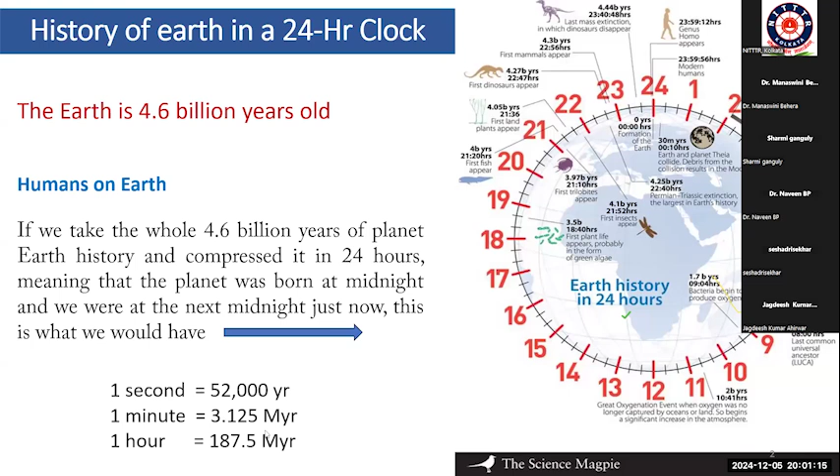Okay. So why I am saying this? Because the way we are exhausting the world's all the resources, we are just creating the pollution. For that, we are studying the management, right? So Earth was existing before our existence. Earth doesn't need us. We need Earth for our existence. For that, we need to conserve our resources and we need to keep our Earth in a livable condition. For that, everything comes in the management.

Like solid waste is a part, which is a major concern nowadays because in few years, India will be requiring the area for solid waste disposal; the area of Bangalore, Hyderabad, Mumbai, and Kolkata, whatever is the area, that much area will be required for dumping the solid waste the way we are generating.

Now you can see the population growth, world population growth through history. You can see the future increment in the 21st or 22nd century. And we can see we will be soon reaching 12 billion in 2100. Okay, though the rate of growth is decreasing, the population is rising. And accordingly, we are generating more waste. Our consumption is increasing and we are generating more waste, which is to be managed.

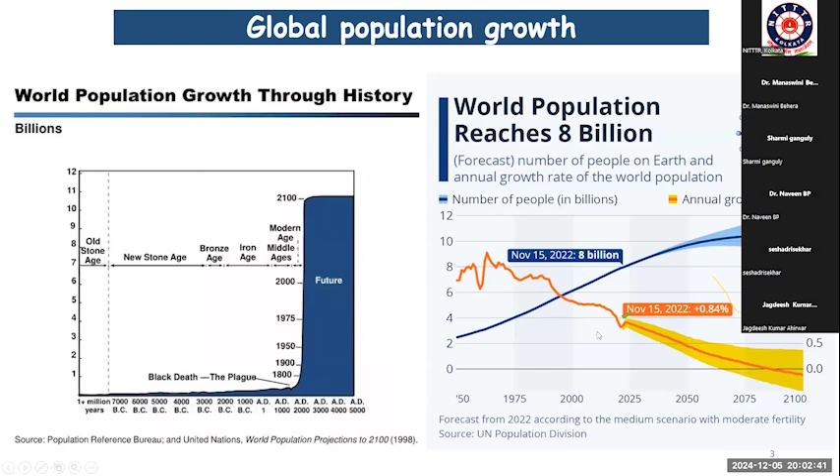Then here you can see another problem is in the solid waste management in this urban area. Okay, this figure shows the share of the total population living in urban area.

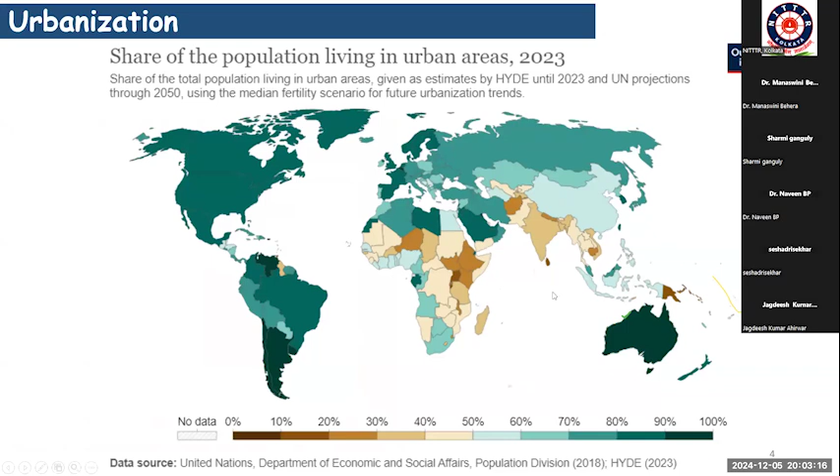You can see more than 50%, the green or dark green regions are the share of the population living in urban areas. And you see not in India, but in other parts, mostly North America, South America, the European Union, Russia, and Australia, most of the people are living in urban areas.

This urbanization trend shows that in 1900, 2 out of every 10 people lived in urban areas. But by 2050, 7 out of every 10 people will live in urban areas, meaning more than 70% of the global population will be living in urban areas.

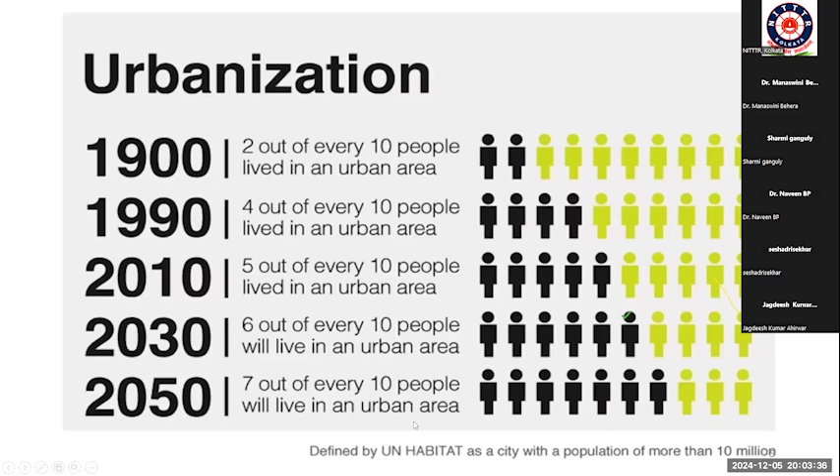Almost all population growth is expected in cities and towns of developing countries. By 2050, the most populous countries, India and China, will see major urbanization: in China 70% of the population will be urban, and in India 50% will be urban. More than 26 cities will have over 1 million people.

This urban growth will require 100 to 200 million hectares of land.

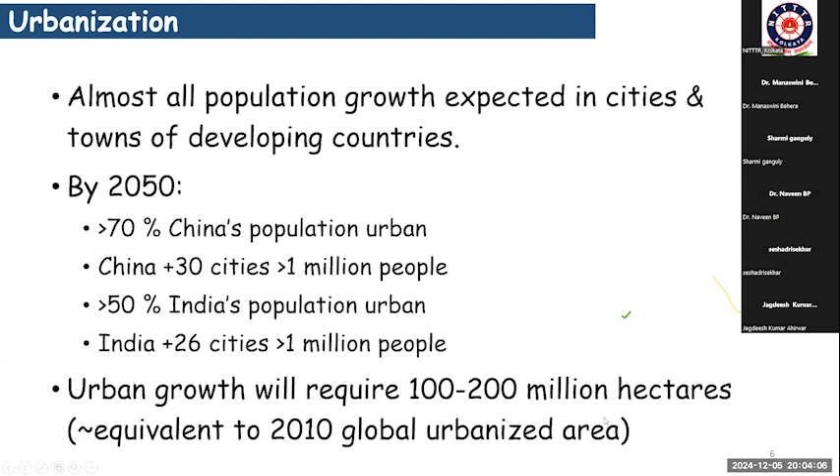Another important concept is Earth Overshoot Day. In 2024, Earth Overshoot Day falls on 1st August. It marks the day when humanity has used up nature's budget for the year. Whatever resources exist on Earth for the population, we have consumed them all for the entire year by 1st August.

After 1st August, whatever we consume, we are taking from our future needs, from next year's resources. For the rest of the year, we maintain an ecological deficit by drawing down local resource stocks and accumulating carbon dioxide in the atmosphere.

In that context, if you see the trends in solid waste generation, the world generates around 2.01 billion tons of municipal solid waste as per World Bank data in 2024. At least 33% of that is, very conservatively, not managed in an environmentally safe manner.

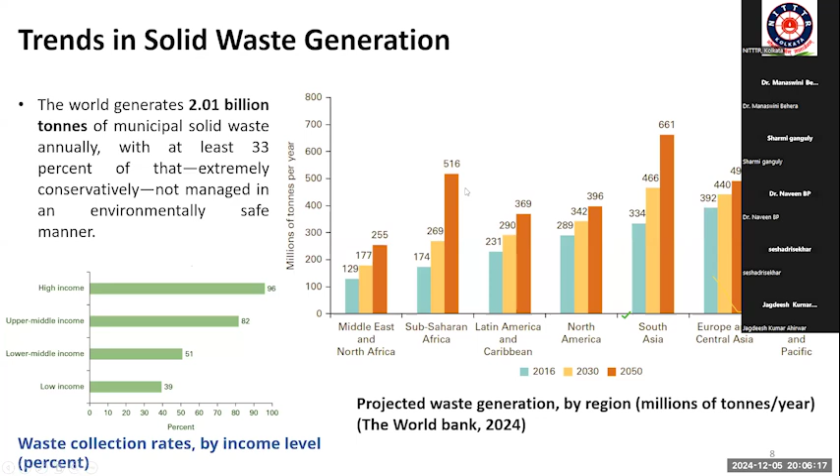In sanitation, solid waste also plays a part when we dump it in receiving water bodies, polluting drinking water supplies. Also for sustainable cities, we need to maintain them sustainably, which means ensuring the solid waste generated in the city is well managed. To attain goal 11, solid waste management is required.

Now coming to solid waste management, refer to this figure. This we cannot call a landfill - this is just a dump site where everything we are not using, which is of no use to us, we are just dumping.

In a properly managed way, waste should be segregated into different bins, but in most Indian cities this is not happening. As far as possible, we have the Solid Waste Management Rules 2016, which require proper segregation at source, proper collection, proper transportation, and management as per the solid waste management hierarchy - but it is not happening.

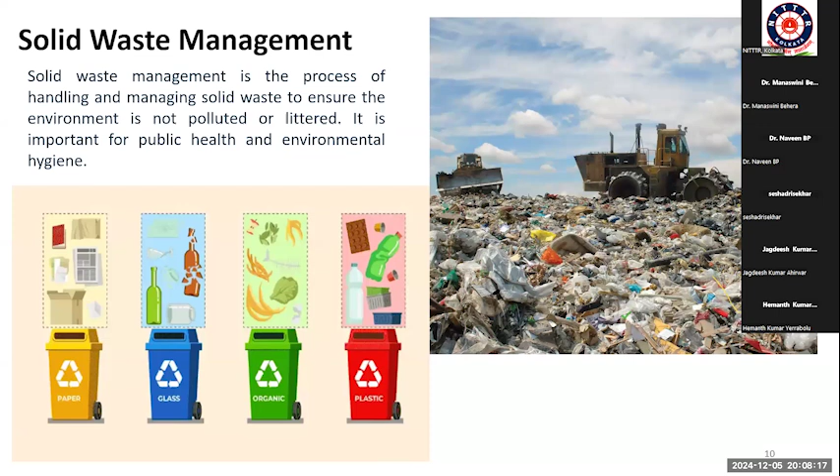Biodegradable fraction is 50%, recyclables are 20%, inert is 22%, and others 8%.

But to attain the sustainable goal or circular economy, we have to shift the paradigm towards a new waste management approach, where the least preferred option should be landfill disposal and the first option should be waste prevention, refuse, or reduce. Through product design and producer responsibility, we can reduce the generation of solid waste.

After use, we should focus on reuse, which is the next option. Then the next option is recycle. After reuse, it should be recycled into its original product or some other product, and then reused again.

Then the next thing is conversion or compost. Compost means the biodegradable fraction is composted to get manure.

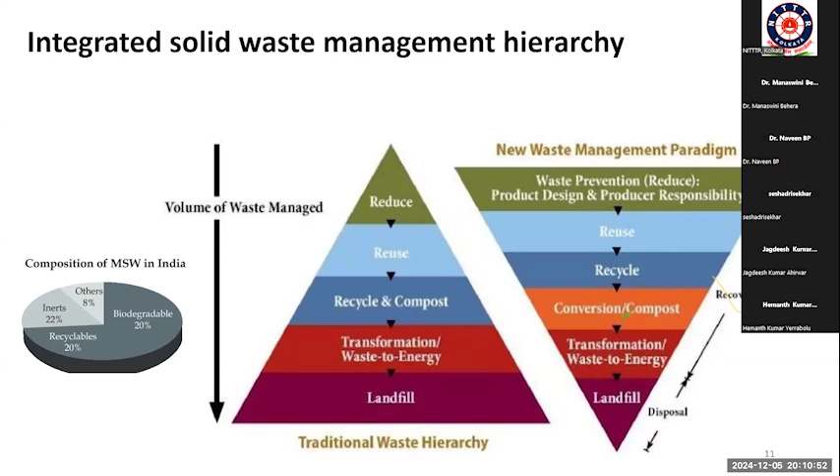Today's topic is waste to energy through thermal conversion. So we will be focusing on thermal conversion. What is thermal conversion of solid waste?

These processes are methods for treating solid waste by heating it at high temperature to break down the organic matter. These processes can reduce the volume of waste by up to 80%, and simultaneously we can recover energy, making it a waste-to-energy facility through thermal conversion.

This thermal conversion can be classified as incineration, gasification, pyrolysis, or plasma arc gasification.

Incineration is a complete oxidation process that burns waste at high temperature to produce ash, flue gas, and heat. Gasification is a partial oxidation process that uses a controlled amount of air or oxygen to produce syngas, which can be used to generate electricity.

In pyrolysis, a thermochemical decomposition process occurs without oxygen, producing mostly solid, liquid, and gaseous products. The primary products are biochar, a solid residue, bio-oil, a liquid residue, and syngas.

The last one, which is mostly in the research stage, is plasma arc gasification, a process that uses an electric arc to heat waste to very high temperature.

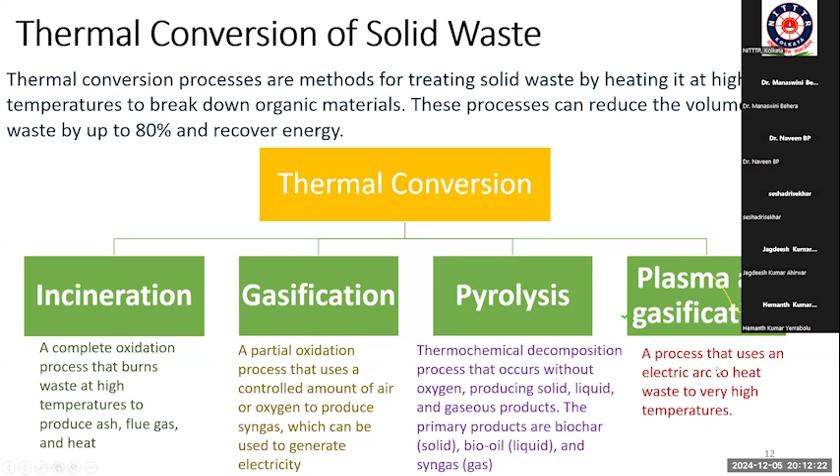Then we'll go one by one. What is incineration? Incineration is the combustion of waste at very high temperature in the presence of oxygen, resulting in the production of ash, flue gas, and heat.

Incineration is a feasible technology for combustion of unprocessed or minimally processed waste. Here, the processing of the waste is not very exhaustive. The waste can be segregated, and with minimal pre-processing, it can be used in the incinerator to generate heat and energy.

The potential for energy generation depends on the composition, density, moisture content, and presence of inert material in the waste. About 65 to 80% of the energy content of the organic matter can be recovered as heat energy, which can be utilized either for direct thermal application or for producing power via steam turbine generator.

Incineration of MSW helps reduce landfill volume. Generally, incinerators are preferred near landfill dump sites where segregation happens. If source segregation is not happening, as much waste as possible can be sent to incinerators so that the load on the landfill reduces.

Incineration is feasible and there is no better option for processing waste where there is shortage of land for landfill. For example, Japan uses incineration because they have very little land available for disposal or dumping of waste.

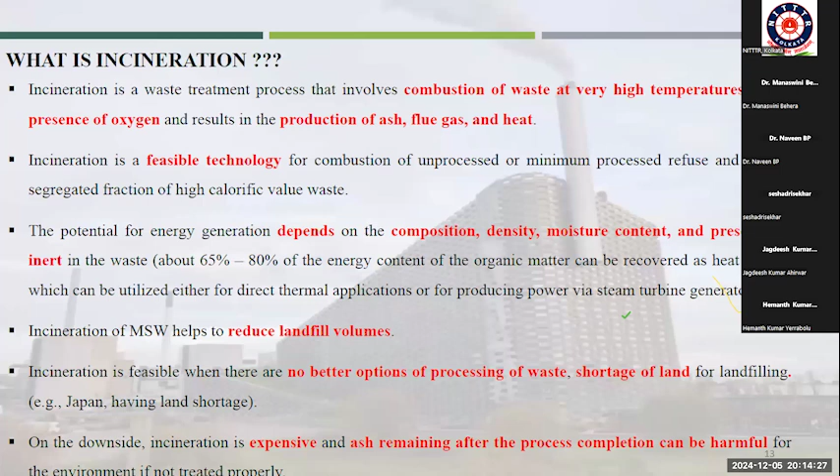Then, what is the incineration objective? One is volume reduction, so the weight of the solid waste to be dealt with is reduced by 70 to 75%. Then, stabilization of the waste: the incinerator output, like ash, is considerably more inert than the incinerator input, that is the solid waste.

Then, recovery of energy from waste. So, we can do the treatment of the solid waste and generate heat, which again can be used for electricity generation. Finally, it also sterilizes the waste.

This is the primary importance in the incineration of clinical or biomedical waste. Mostly all the big hospitals have their own incinerator for the sterilization of biomedical waste. So incineration also ensures destruction of pathogens prior to final disposal in the land.

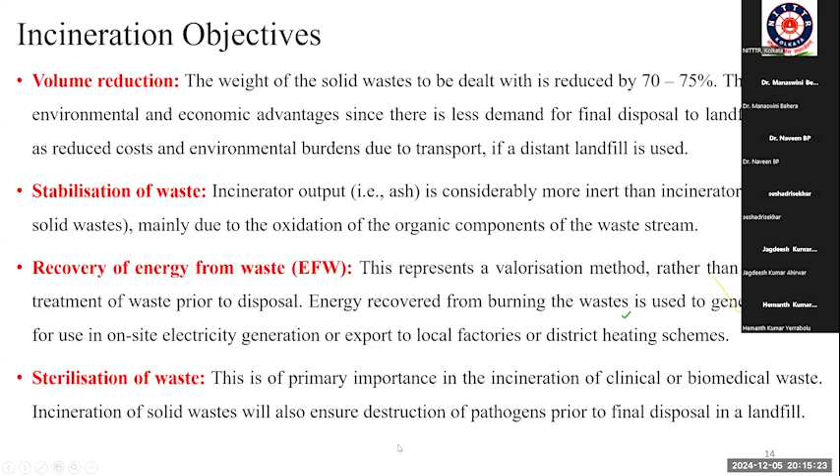So, which kind of waste can be used as fuel in case of incineration? The primary difference between waste incineration and other combustion systems like pyrolysis or gasification is that the waste incineration process treats incoming waste with great variation. So different types of waste composition can be fed into the waste incinerator, but the operating parameters should fall within a range for energy recovery.

There is a table, the source being the manual of MSW management. It says moisture content should be less than 45%, organic or volatile matter should be greater than 40%, fixed carbon should be less than 15%, and total inert should be less than 35%. The calorific value of the waste should be greater than 1500 kilocalories per kg.

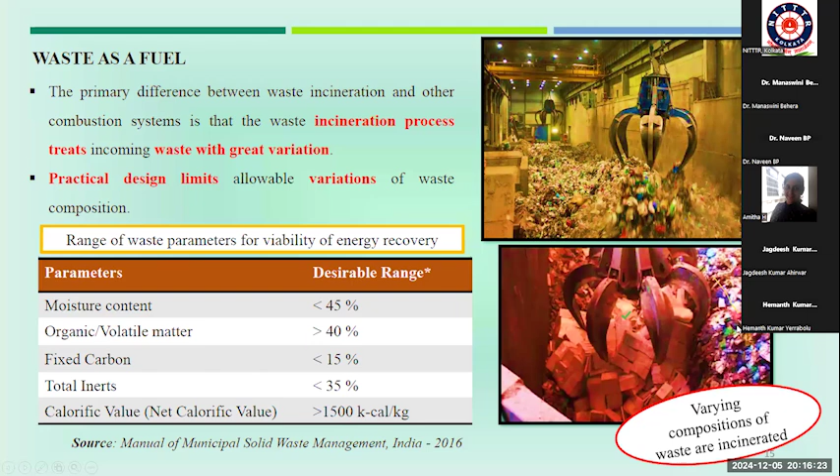So before designing any incinerator, the basic considerations are like having available data on the amount and composition of each waste type. It is not like we take a single day or one week of data and design an incinerator; we should have a good database on the type, composition and quantity of the waste generated, and the effect of future changes in waste management. In future, if there is a chance of taking up other technologies as a viable option to incinerator, then this plant may not be in use.

So we have to take care of the effect of future changes in waste management while considering the design of an incinerator, because the installation cost and operation cost are huge. The waste led to an incineration plant consists of domestic, commercial, institutional and industrial waste, so there is great variation in waste composition, but we should avoid sweepings and construction demolition waste. They are not suitable because they have a high inert content and a large fraction of non-combustible matter.

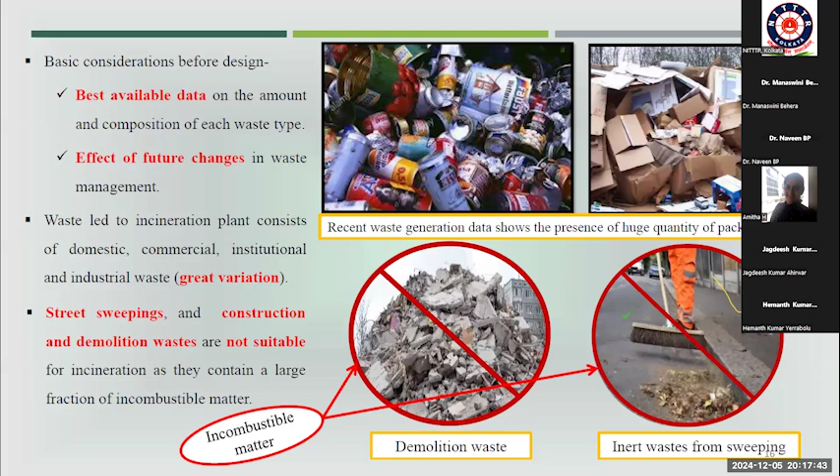So what are the key parameters in characterizing waste as a fuel? It is the heating value: the heat generated per unit weight or volume of combustible material completely burned. Heating value is roughly proportional to the waste that is combustible, excluding the moisture and ash content, and to the carbon content of the combustible fraction.

Then also moisture content, it is a critical determinant in the economic feasibility of the incineration process, since energy must be supplied for evaporation of water and for raising the temperature of the water vapor. It is generally found to be high in waste containing a higher proportion of food waste, so moisture content should be less than 45% if it is to be fed to an incinerator. Then ash content is the substance left after ignition at high temperature.

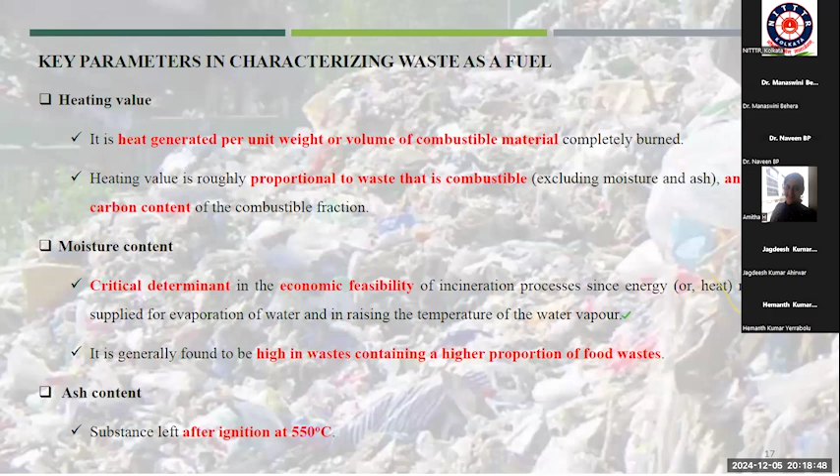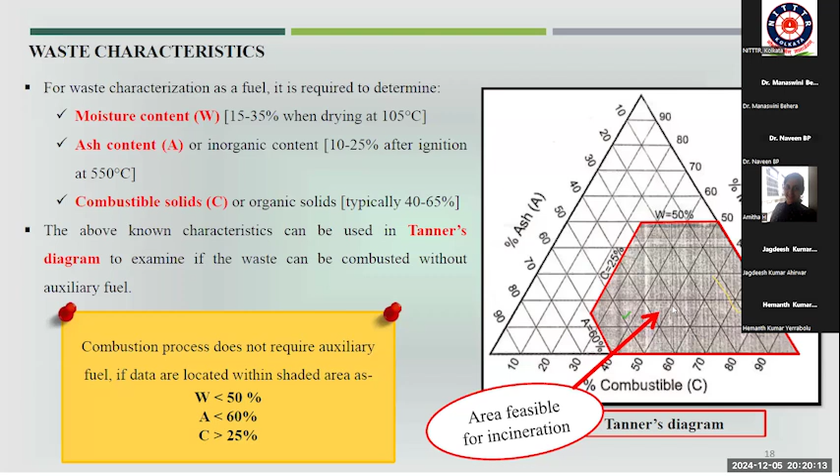Then heating value. We generally calculate the lower heating value and higher heating value. These are variables representing energy released upon complete combustion of a fuel: carbon to CO2, hydrogen to water, sulfur to sulfur dioxide. Whichever energy is released when water leaves the combustion process in its evaporated state, that is the lower heating value. The higher heating value is the energy released on complete oxidation when water leaves the process in its liquid state. It expresses the theoretical maximum energy release from the fuel.

So the difference between lower heating value and higher heating value is the heat of condensation of the water vapor content in the flue gas, originating from the moisture in the waste and moisture generated by the oxidation of hydrogen bound within the chemical structure of the waste.

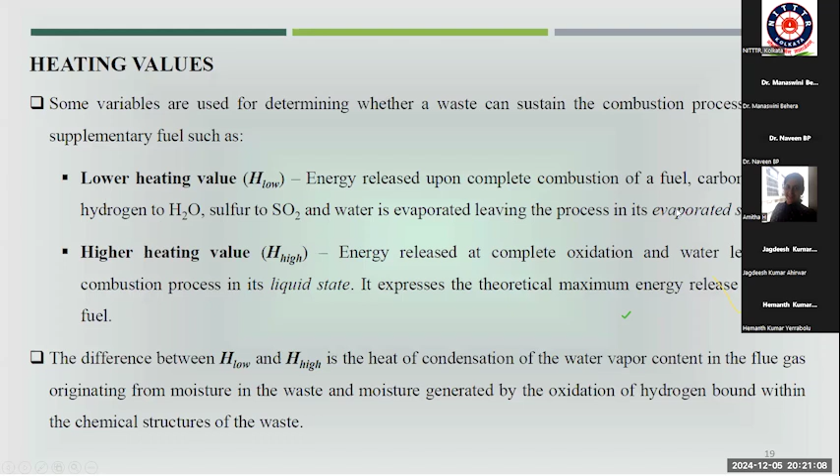Then the incineration process, how it happens in the incinerator: there is a furnace where the combustible components react with oxygen. The solid waste to be incinerated is kept in that furnace and oxygen or air is supplied, releasing a significant amount of hot combustion gas. The moisture content of the waste is evaporated in the initial stage, and the incombustible part of the waste forms the solid residue, that is bottom ash and fly ash. Through incineration, the solid constituents undergo a range of processes as a result of exposure to heat and contact.

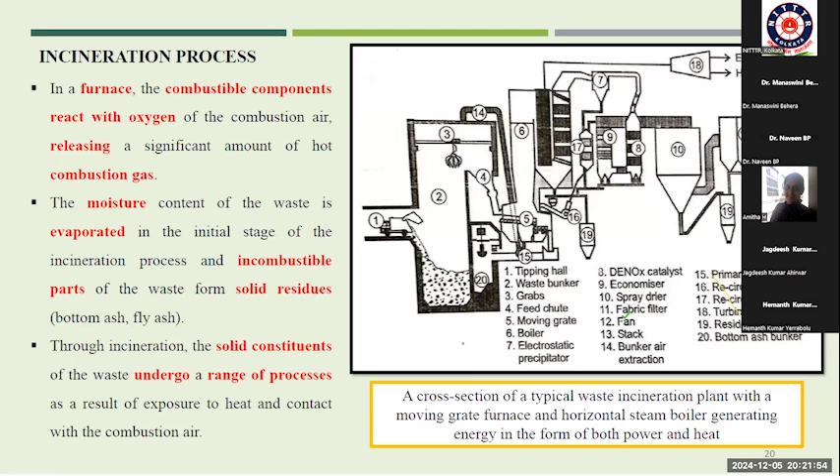The combustion gases pass from the furnace to the afterburning chamber. As per European Union standards, a minimum temperature of 850 degrees centigrade for municipal waste and 1100 degrees centigrade for certain types of hazardous waste has been set for complete burnout of the combustion gases in the afterburning chamber. These temperatures should be maintained for a minimum residence time of 2 seconds, as measured from the last injection of combustion air.

So there is strict legislation: no feeding into the incinerator before attainment of the required temperature. Once the 850 degree temperature is attained, only then should feeding be done, and a required residence time of 2 seconds should be given. If there is any interruption, such as a drop in temperature, feeding should be stopped right away. In India, as per the CPHEEO manual 2016, a minimum gas phase combustion temperature of 850 degrees centigrade for municipal solid waste and a minimum residence time of the flue gas above this temperature of 2 seconds, after the last incineration air supply, should be followed.

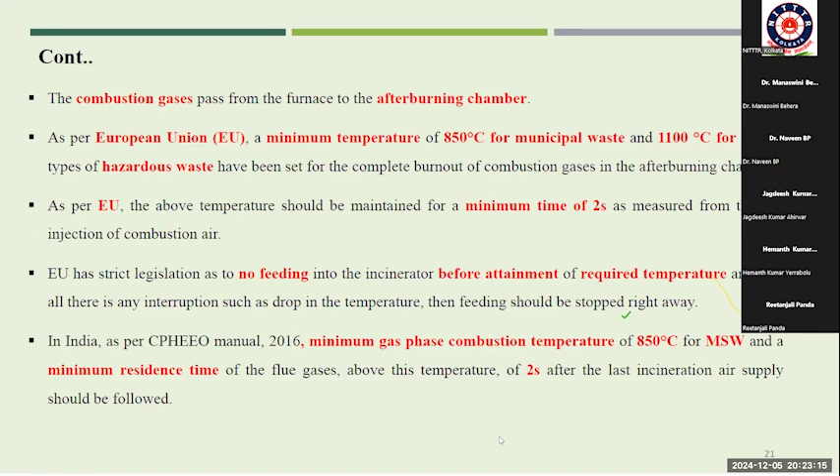So what pre-treatment is required for solid waste before incineration? Depending on the quality of the waste and the incineration system, some pre-treatment techniques may be necessary, involving sorting and homogenization of the waste before incineration. We have to sort out inert materials from the waste so that for proper mixing, a uniform waste is fed. So homogenization of the waste is required.

For mass burning incinerators, the pre-treatments include removal or shredding of bulky or heavy items, and mixing of low and high heating value waste. For homogeneous waste, pre-treatments include shredding for homogenization, screening for narrowing the particle range to the fluidized bed, and removal of metallic iron with magnets. So these are the pre-treatments.

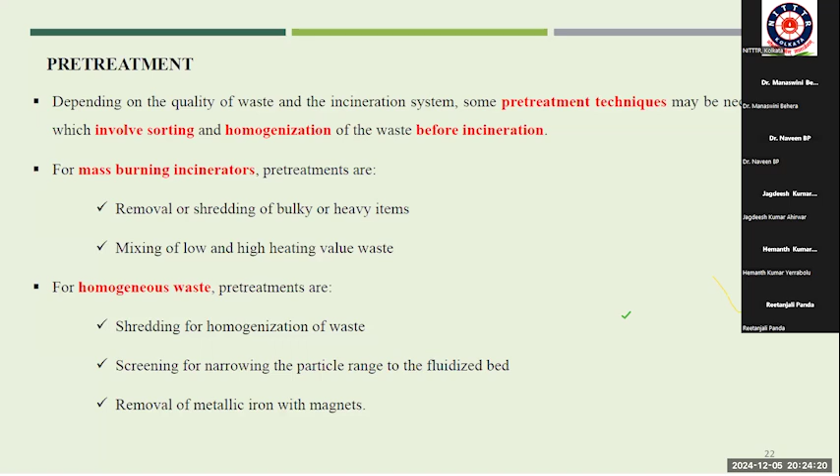Then, mass burning incineration. Most of the incinerators installed are mostly mass burn type. This facility typically consists of a reciprocating grate combustion system and a refractory-lined water wall steam generator. This mass burn system generally consists of either two or three incineration units, ranging in capacity from 50 to 1000 tons per day. These facilities can accept refuse that has undergone little pre-processing, other than removal of oversized items, which is why it is called a mass burning system.

Although this versatility makes mass burn facilities convenient and flexible, local programs to separate household hazardous waste like cleaners and pesticides, or to recover certain materials like iron scrap, are necessary to help ensure environmentally viable incineration and resource conservation as well. It is not like in mass burning all the MSW is just dumped in. Bigger size particles as well as metals should be removed before feeding into the mass burning incinerator.

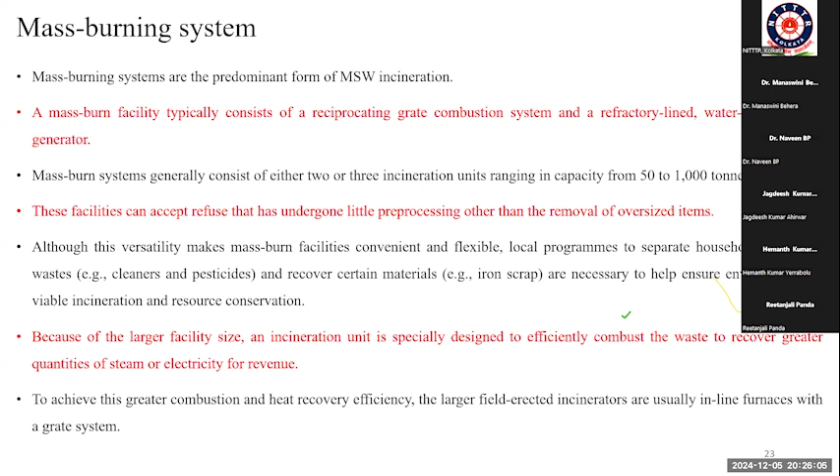Because of the larger facility size, the incineration unit is specially designed to efficiently combust the waste to recover greater quantities of steam or electricity for revenue. To achieve this greater combustion and heat recovery efficiency, the larger field-erected incinerators are usually inline furnaces with a grate system. The mass burning system can also be achieved by use of a rotary kiln. Rotary kilns use a turning cylinder, either a refractory or water wall design, to tumble the waste through the system, rotating for better mixing and better contact with the fuel.

The waste intake area usually includes a tipping floor, pit, or crane. I'll show the photograph later.

At least two combustor units are included to provide a level of redundancy, allowing waste processing at a reduced rate. Mass burn facilities generate high quality steam with high pressure and temperature, which is passed through a turbine generator to produce electricity, or through an extraction turbine to generate electricity as well as provide process steam for heating or other purposes.

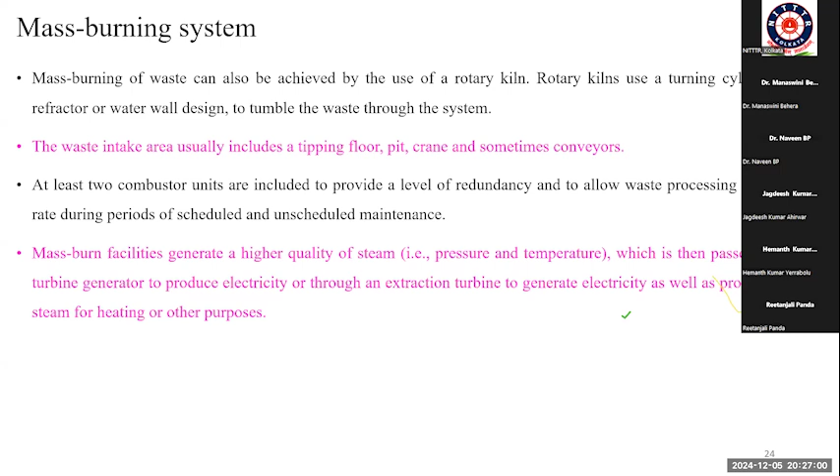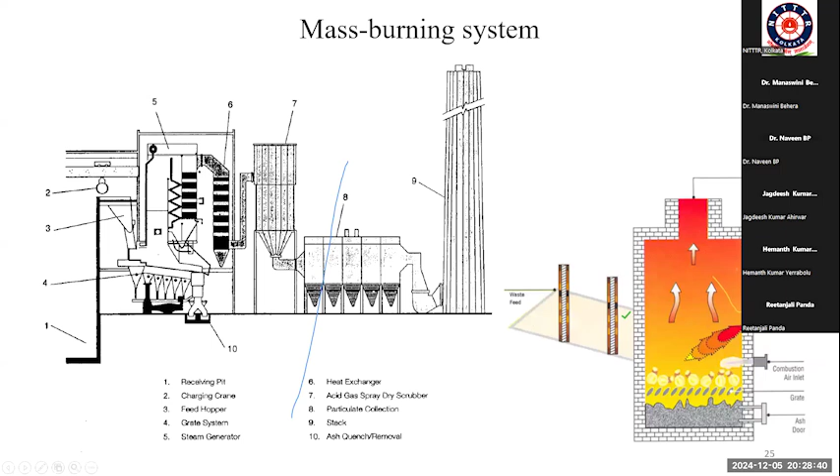This is the mass burning incinerator system, where all the waste is generally fed into the reactor and mass burning of the waste occurs.

Also, in incineration, refuse derived fuel (RDF) can be fed to get better efficiency. RDF is defined as the fuel derived from the combustible waste fraction of solid waste, like plastic, wood, pulp, and organic waste, other than chlorinated materials, mostly in the form of pellets or fluff, produced by drying, shredding, and dehydrating. First the waste is dried, then comminuted or shredded to smaller size, dehydrated, then compacted into solid waste granules.

The composition of RDF has a higher concentration of combustible material than the parent mixed MSW, since some segregation has happened and the waste has been dried, reducing the moisture content, giving it a higher concentration of combustible matter.

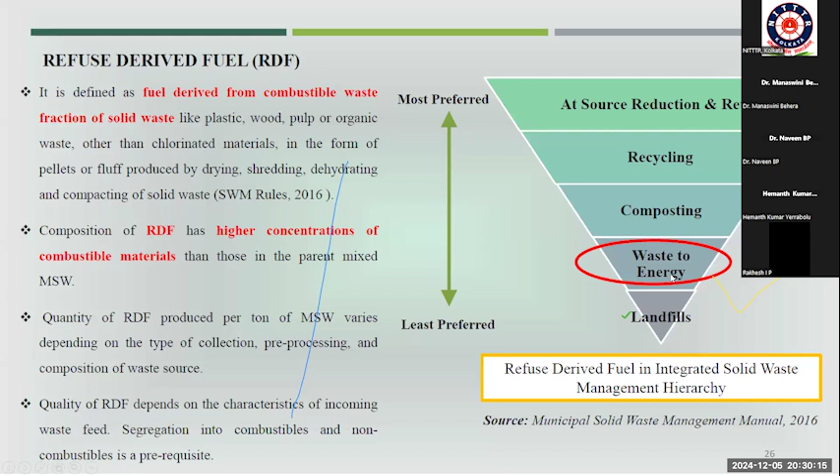The quantity of RDF produced per ton of MSW varies depending on the type of collection, pre-processing, and composition of the waste source. The quality of RDF depends on the characteristics of the incoming waste; segregation into combustible and non-combustible is a prerequisite. In waste to energy systems, we can use this RDF incinerator to generate energy.

RDF production facilities make RDF in various forms through material separation, size reduction, and pelletizing. Although RDF processing has the advantage of removing recyclables and contaminants from the combustion system, on average, the capital cost per ton of incineration units that use RDF are higher than mass burning or other incineration options, because making RDF requires another setup, which is costly, making both operation and capital costs higher than mass burning.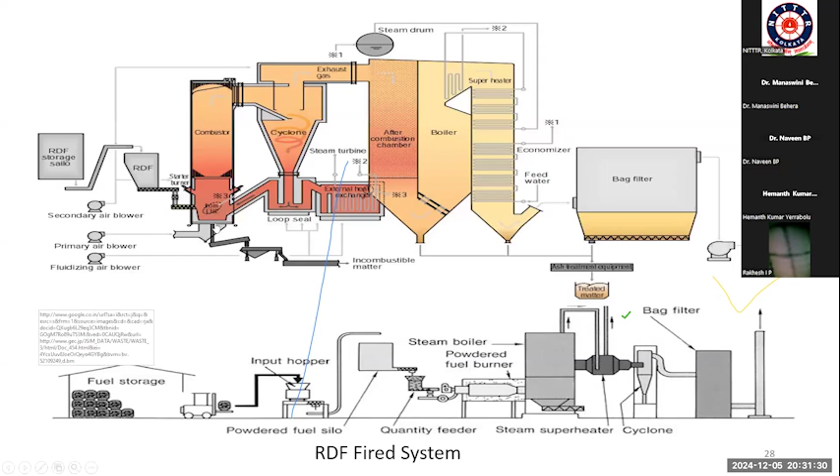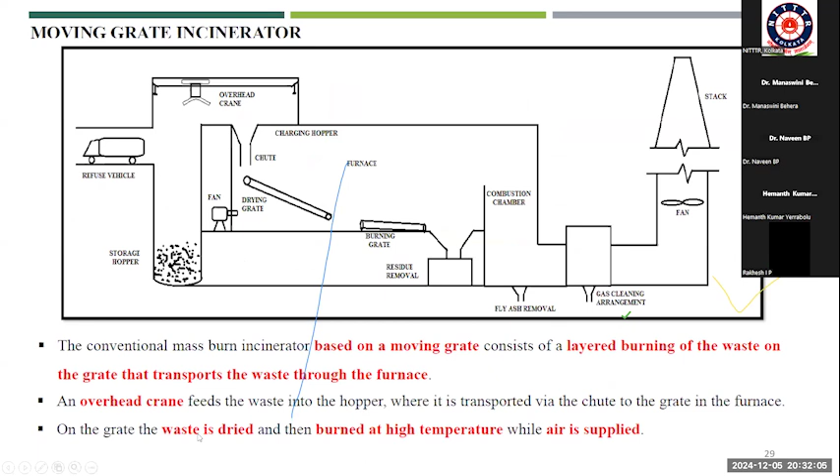This is another type of incinerator, the moving grate incinerator. Like a conventional mass burn incinerator, it is based on a moving grate consisting of layered burning of waste on the grate that transports the waste to the furnace. Layer by layer, the waste is fed by the overhead crane into the hopper, where it is transported via the chute to the grate furnace. On the grate, the waste is dried and then burned at high temperature while air is used.

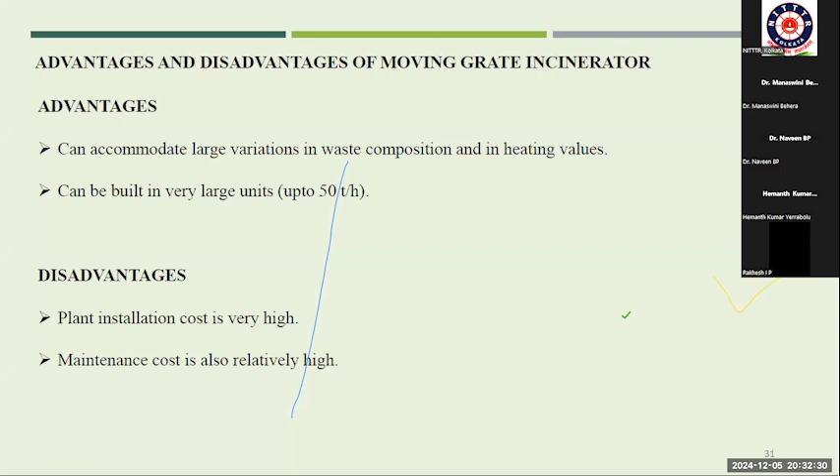What are the advantages and disadvantages of the moving grate incinerator? It can accommodate large variation in waste composition and heating value, and can be built in very large units, up to 50 tons per hour. But the disadvantage is that the plant installation cost is very high, and the maintenance cost is also relatively higher.

Another type of incinerator is the rotary kiln type. This is another mass burn incinerator based on the layered burning of waste in a rotating cylinder; the combustor rotates.

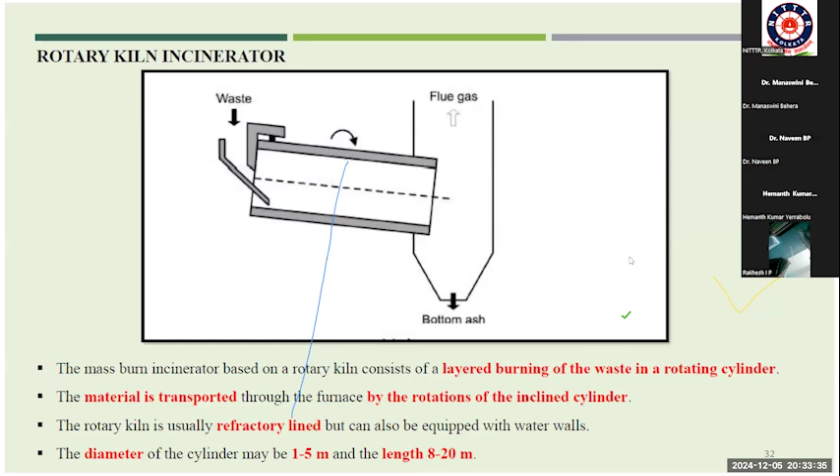The material is transported through the furnace by the rotation of the inclined cylinder. The cylinder rotates. Then the rotary kiln is usually refractory lined but can also be equipped with water walls. The diameter of the cylinder may be 1 to 5 meters, and length is 8 to 20 meters. And the capacity should be within the range of 2.4 tons per day to 480 tons per day.

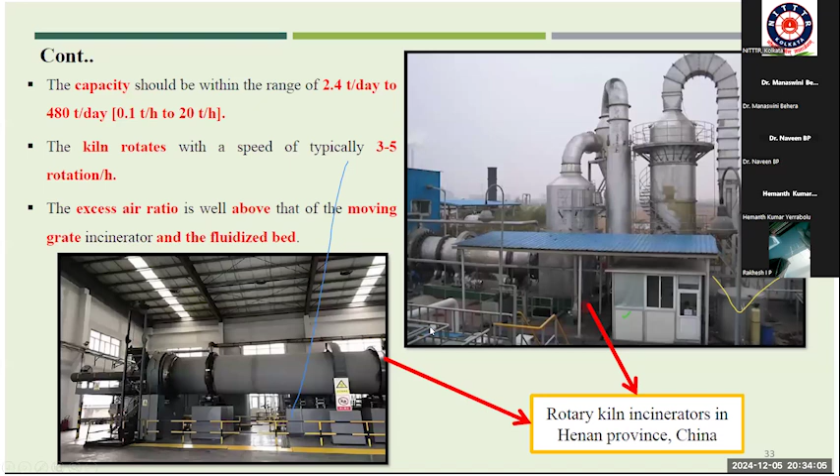Then the kiln rotates with a speed of around 3 to 5 rotations per hour, and the excess air ratio is well above that of the moving grate incinerator. So here more air is required, and this photograph is a rotary kiln incinerator in Henan province, China. And the energy efficiency here doesn't exceed 80%, as the retention time of the flue gas usually is too short for complete reaction to take place in the rotary kiln itself.

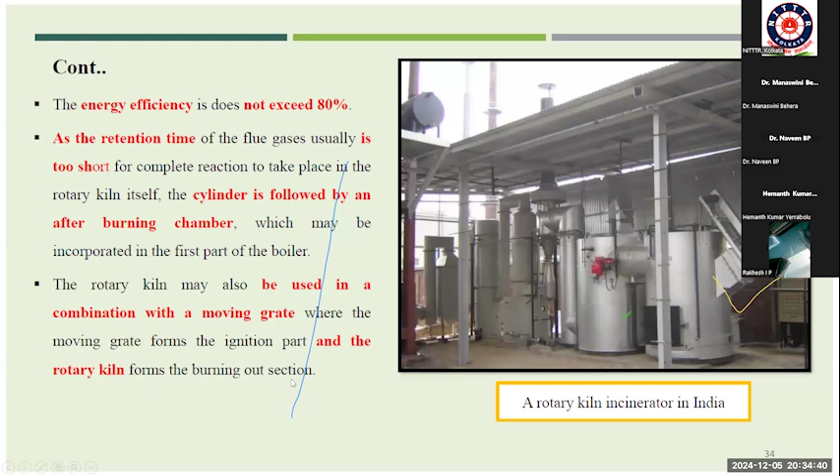The cylinder is followed by an after burning chamber because the complete combustion of the flue gas is not happening in the cylinder. So there is an after burning chamber which may be incorporated in the first part of the boiler. And the rotary kiln may also be used in combination with a moving grate, where the moving grate forms the ignition part and the rotary kiln forms the burning out section.

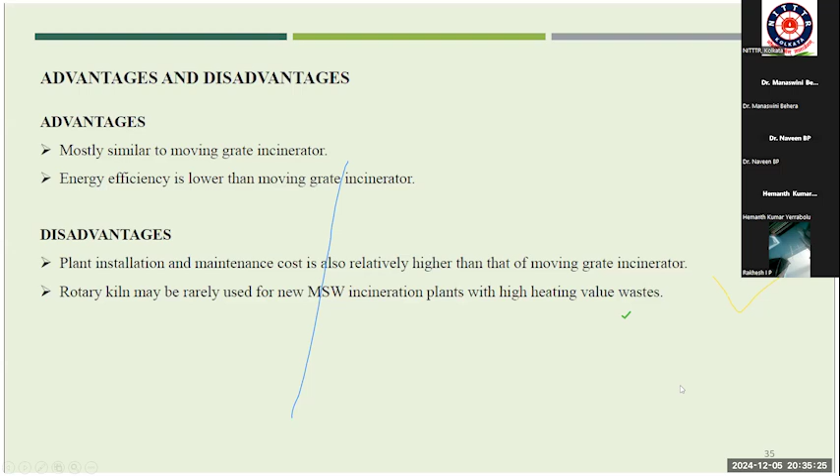So the advantages and disadvantages of this type are mostly similar to the moving grate incinerator, but the energy efficiency is lower than the moving grate incinerator. And the disadvantage is plant installation and maintenance cost is relatively higher, and rotary kiln may be rarely used for new MSW incineration plants with high heating value waste, because if the waste has high heating value but the energy efficiency of the rotary kiln incinerator is less, then the energy recovery will be less. So most of the waste energy content will be wasted. Therefore, this is not preferred.

Then another type of incinerator is the fluidized bed incinerator. It works on the principle where solid particles mixed with the fuel are fluidized by air. So here generally the bed fluidizes. The solid particles are in moving condition inside the incinerator. So by fluidization, the fuel and the solids are suspended in an upward air stream. So the solid waste behaves like a fluid, because the fuel and solid are mixed and they are suspended in the upward air stream.

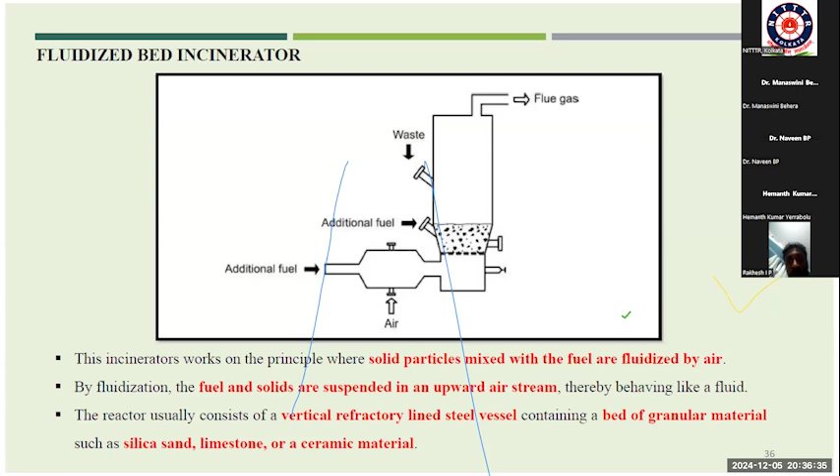The reactor usually consists of a vertical refractory lined steel vessel containing a bed of granular material such as silica sand, limestone, or a ceramic material. So over that, the solid waste is kept, and if the air is allowed to flow through this bed, it makes the solid waste remain in suspension inside the incinerator. So there is better contact between the solid waste and fuel, and the incineration efficiency is better.

So fluidization of the bed is ensured by air injection through a large number of nozzles in the bottom of the incinerator. So it causes a vigorous agitation of the bed material. So the incineration occurs in close contact with the bed material and combustion air, allowing a relatively low excess air level. And here the thermal efficiency is very high, up to 90%. So here you can see a fluidized bed incinerator in the USA, and one in Japan.

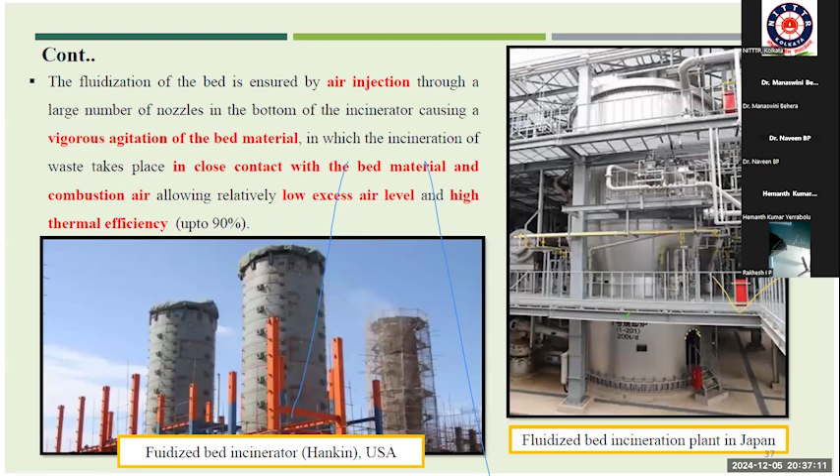So the advantages of this type are reduction of dangerous substances in the fluidized bed reactor, and flexibility regarding low quality fuels or cost. NOx generation may be low due to relatively low and well controlled combustion temperature. Then the burnout of flue gas and particles is very good, and capital and maintenance costs are relatively lower than other types. Then a disadvantage is demanding pre-treatment for smooth functioning. It is mostly useful for homogeneous waste types, which include liquid waste.

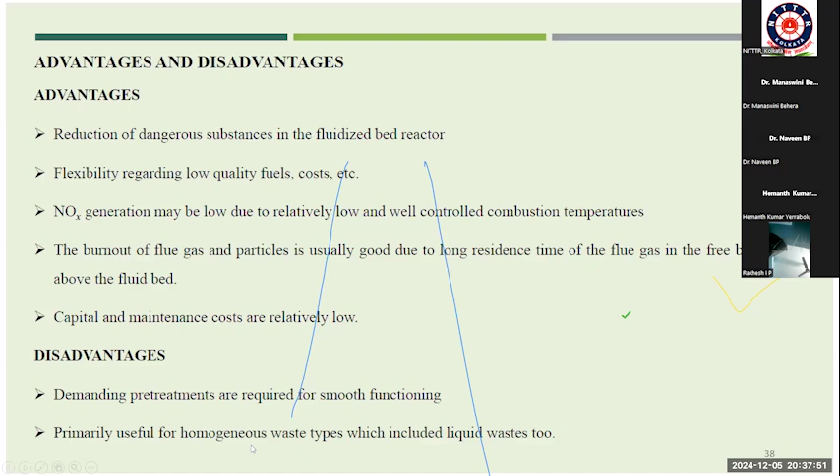So then coming to the practical application, there are many incinerator plants installed, but I think now only 12 incineration plants in India are operational. Many are installed but not functioning. So this is a case study for the first waste incineration plant in India, which failed.

So in 1987, the Ministry of Non-Conventional Energy Sources commissioned the Timarpur Refuse Incineration cum Power Generation Station at a capital cost of 20 crores. The plant itself was imported from Denmark, and it was designed to incinerate 300 tons of MSW per day to generate 3.75 megawatts.

So the plant was shut down after 21 days of trial operation due to poor quality of incoming waste. So therefore, as I said before, we have to properly identify the waste quality as well as quantity. And as I said, there is a particular operating parameter that should be maintained for efficient incineration, but this plant failed within 21 days of its trial.

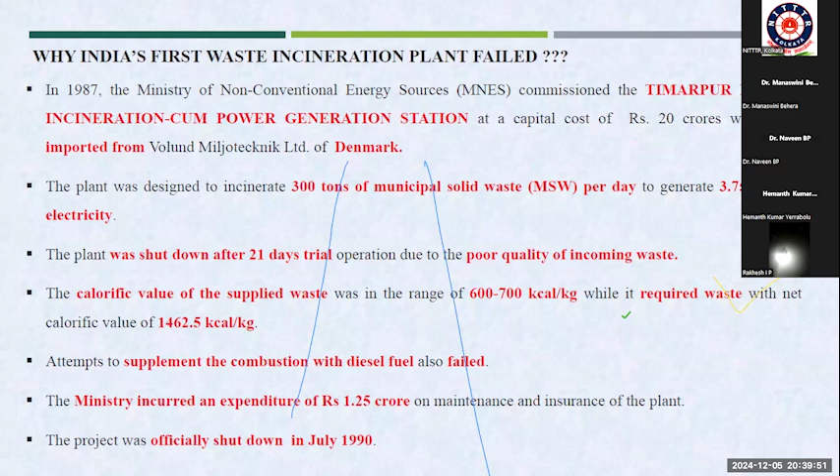So the calorific value of the supplied waste was in the range of 600 to 700 kilocalorie per kg, while the required net calorific value is 1462.5 kilocalorie per kg. It was designed for that, but the waste which was coming was having less than 50% of the required calorific value. Then an attempt to supplement the combustion with diesel also failed. Then the ministry incurred an expenditure of 1.25 crore on maintenance and insurance of the plant. The project was officially shut down in July. So it was a failure, the first incineration plant.

Then next is Narela Bawana Waste to Energy Plant, Delhi. So the news article says India's largest solid waste to energy plant launched in Delhi at Narela. So North Delhi Municipal Corporation launched the waste to energy plant in the year 2017, and the project is using 2000 metric tons of waste every day to generate 24 megawatt of energy. The project is spread over 100 acres of land. The Rupees 458 crore project has been developed on PPP model by Ramky Group, which is a Hyderabad-based waste management company, in collaboration with North Corporation. As per the agreement, the electricity generated from the plant will be sold by the concessionaire.

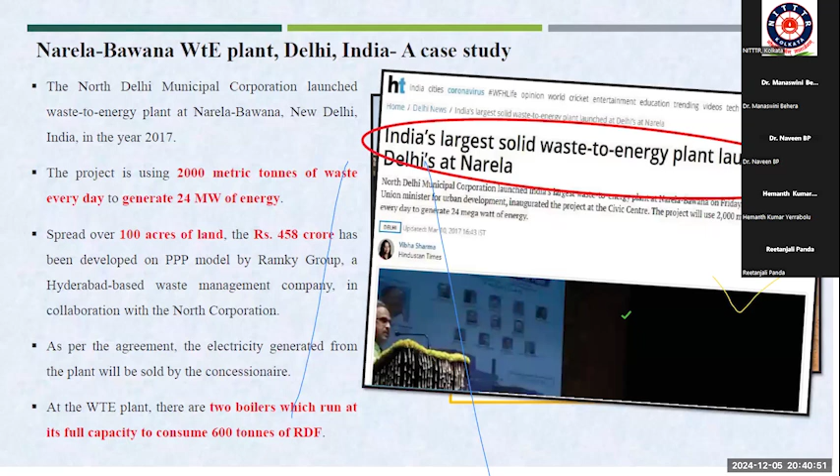At the waste to energy plant, there are two boilers which run at full capacity to consume 600 tons of RDF. And the facility comprises a scientifically engineered landfill, Narela Bawana, the first in Delhi. So in the landfill, whatever waste comes, the segregation happens there. Those which are not combustible are generally dumped. The rest goes to the incineration part after taking out the recyclable fraction.

The solid waste is collected door to door from households in Rohini and Civil Lines and transported to the landfill, where it goes to the MRF. On the landfill site, there is an MRF, meaning material recovery facility. The MRF reclaims metals and other recyclables, so it's of great value, and produces compost out of the organic waste. The waste is further segregated to obtain RDF, which is burnt above 1000 degrees centigrade to produce electricity. And the fly ash generated is less than 20% of the feed, which is carefully dumped in the landfill. So this plant alone handles about 20% of the waste.

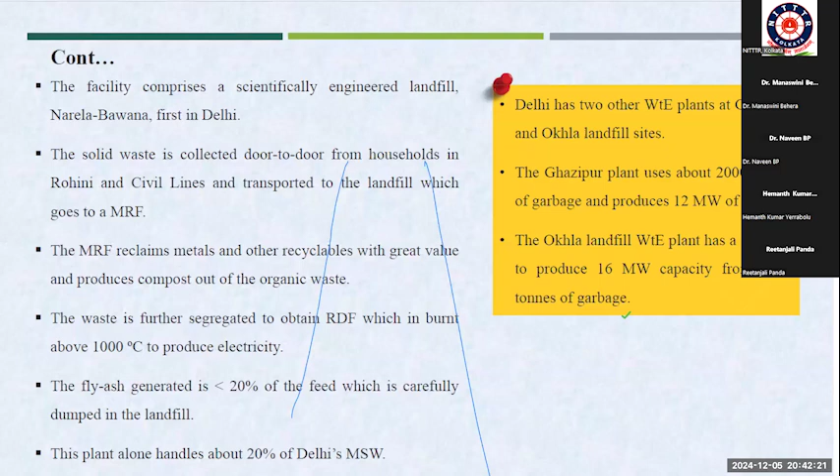And apart from that, Delhi has two other waste to energy plants at Ghazipur and Okhla landfill sites. The Ghazipur plant uses about 2000 tons of garbage and produces 12 megawatt of energy. And the Okhla landfill waste to energy plant has a capacity to produce 16 megawatt from 1200 tons of garbage.

So Okhla waste to energy plant, that is another case study. So the Okhla landfill waste to energy plant in South Delhi has a capacity of 16 megawatt, and it consumes 1200 tons of garbage. The incineration plant was commissioned in January 2012 and is processing about 1600 tons per day of waste. After pre-processing, it is fed into the incineration plant, generating about 16 megawatt of electricity.

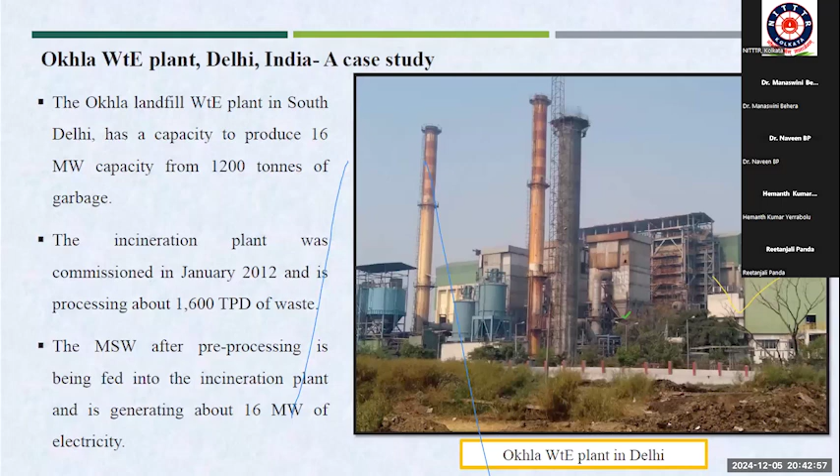Then coming to the next thermal conversion process, pyrolysis. So what is pyrolysis? Pyro means fire and lysis means separating. So here there are a series of reactions where the molecular breakdown of larger molecules into smaller molecules happens in the presence of heat. Pyrolysis is also known as thermal cracking, or only cracking, or thermolysis. So there are many synonyms of pyrolysis.

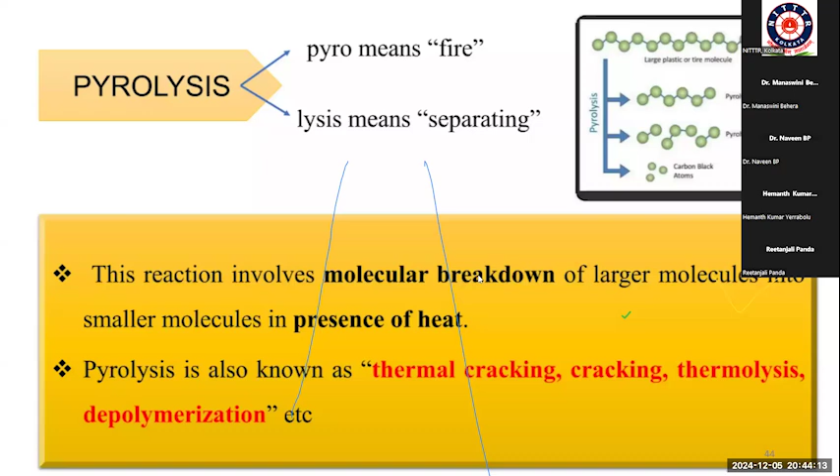So here, what happens? You can see the example where the biomass is wet wood. In the absence of oxygen or limited supply of air, heat flows in and the material is dried, torrefied, then biochar is produced, and with different temperatures, other end products like bio oil or syngas can be produced from different feedstocks. Heat flows in and out of the biomass and char slowly, and it takes about 1 hour for charring to penetrate 30 mm into the wood, the charring progressing at about 0.5 mm per minute.

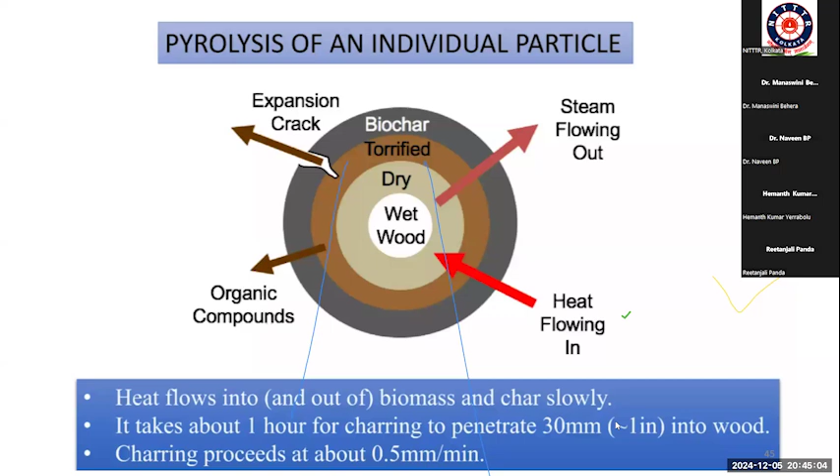So what are the feedstock for pyrolysis? It should have a particular optimum moisture content around 10%, because higher moisture content produces high level of water and lower moisture content produces dust instead of bio oil. Then particle size is also another factor affecting the pyrolysis. Like efficiency and nature of the pyrolysis is dependent on the particle size.

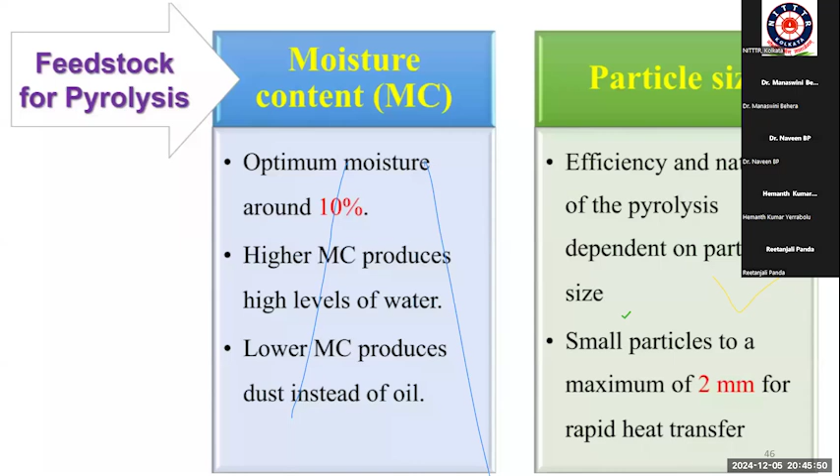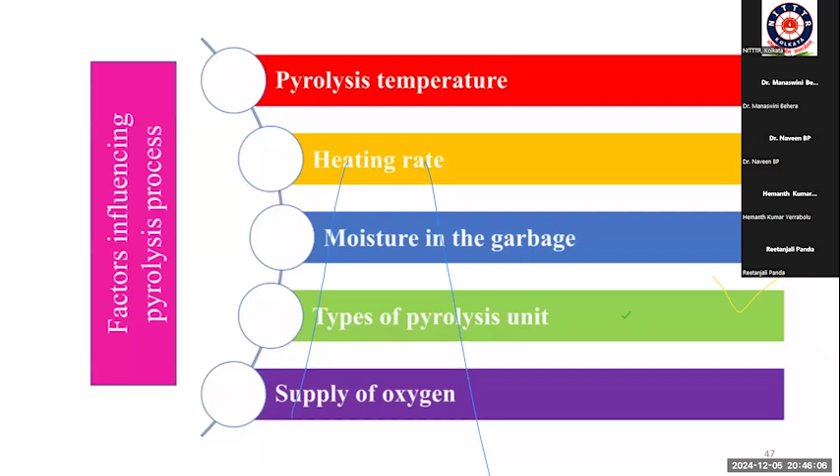Small particle to a maximum of 2 mm for rapid heat transfer, because anyway final thing is heat should be transferred from outer to the inner of the particle. So the less is the particle size, the better will be the heat transfer and better pyrolysis. So the other factors that affect the pyrolysis processes are pyrolysis temperature, heating rate, moisture in the garbage, types of pyrolysis unit, as well as supply of oxygen.

So, depending on the process parameters, the pyrolysis can be classified as flash pyrolysis, fast pyrolysis, then slow pyrolysis, and microwave pyrolysis. So, flash pyrolysis is like heating temperature between 400 to 600 degrees centigrade. Fast pyrolysis occurs at a temperature of 650 to 1000 degrees centigrade. Slow pyrolysis generally is a slower process than the flash or fast pyrolysis, and prevailing temperature is around 500 degrees centigrade. And microwave pyrolysis, heating temperature 200 degrees centigrade, but it happens in a microwave reactor.

Many of us have seen the microwave we are using for cooking purpose at home. So similar type of reactor is generally modified for the pyrolysis of the solid waste. There should be inert gas provision, and with the heating, we can do microwave pyrolysis. What happens? Proper heating from all the direction, uniform heating of the biomass happens. So whatever end product we get is of good quality. The bio oil heating value will be better. If we are producing biochar, the surface area produced through microwave pyrolysis is better than other pyrolysis processes.

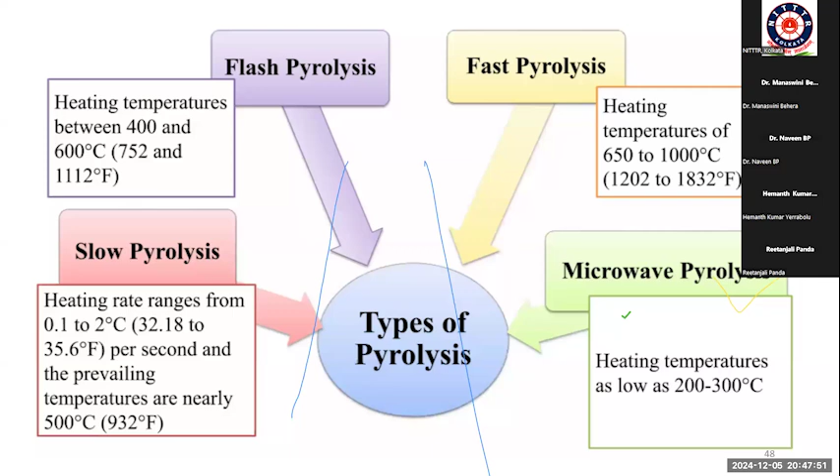Then here some comparison: in slow pyrolysis, the residence time of the gas may be over 5 seconds. And during slow pyrolysis, tar and char are released as main product as the biomass is slowly devolatilized. Then in fast pyrolysis, biomass is rapidly heated depending on the desired amount of bio oil or gas products. Char is accumulated in large quantities and the yield is about 60% of the bio oil. Then flash pyrolysis, residence time of gas is less than 2 seconds. It produces fewer amount of gas and tar when compared to slow pyrolysis, and 75% bio oil yield is there.

Then microwave pyrolysis, it is a fast pyrolysis process, and here the fast pyrolysis gets the benefit of the microwave heating. It reduces the time taken to initiate the pyrolysis reaction. Suppose if another pyrolysis takes 1 hour, it can be obtained in 10, 20 minutes or even less than that. It reduces the time taken. Then microwave bio oil could be used as a replacement for crude oil also. So there are different types.

How to choose means our objectives would be what should be the end product, whether we want biochar or bio oil. If we want biochar, then we should go with the slow pyrolysis or fast pyrolysis with some process modification. If we want bio oil at higher concentration, we can go for fast pyrolysis. And in microwave pyrolysis, we can play with the microwave power as well as the microwave time or the feedstock composition to get more bio oil or biochar. So depending on the end product or uses of the end product, we can select which type of pyrolysis we want.

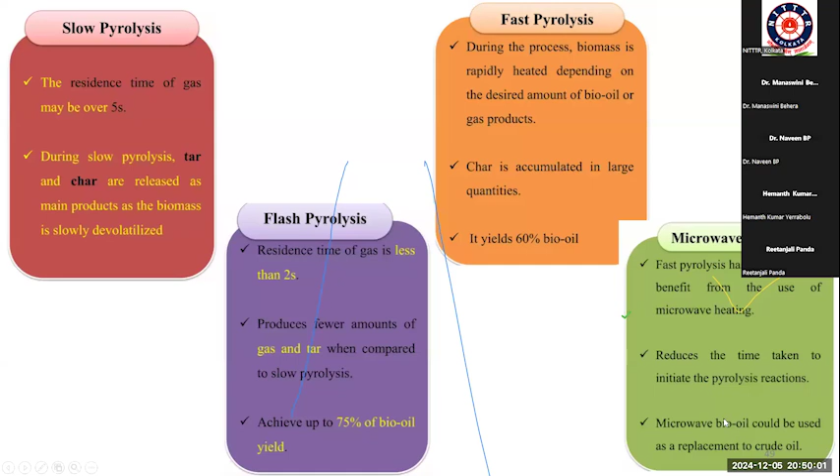Then some pros and cons of the pyrolysis. Simple, inexpensive technology and environmental friendly. If it is saying inexpensive, sometimes inexpensive may be capital cost, but the operating cost is there, and it's better waste management because there is usable end product. Unlike incinerator, where bottom ash is to be managed, here there is no bottom ash or any ash produced. Whatever end products are generated are again used, either biochar or bio-oil. So it reduces the country's dependence on imported energy resources.

So then what are the disadvantages? Requires dry product. The moisture content should be less. So it requires pre-processing. So for a huge quantity of solid waste, when we go for pyrolysis, it requires drying. Means moisture content should be as low as 15%, 10%. So in drying, a lot of area requirement is there. So in lab scale, what people are doing, they are doing oven drying and then doing the pyrolysis.

Practically, it is not possible when 1,000 to 2,000 tons per day MSW is generated, so open drying will take time. For that, huge area is required. So that is a major disadvantage of pyrolysis.

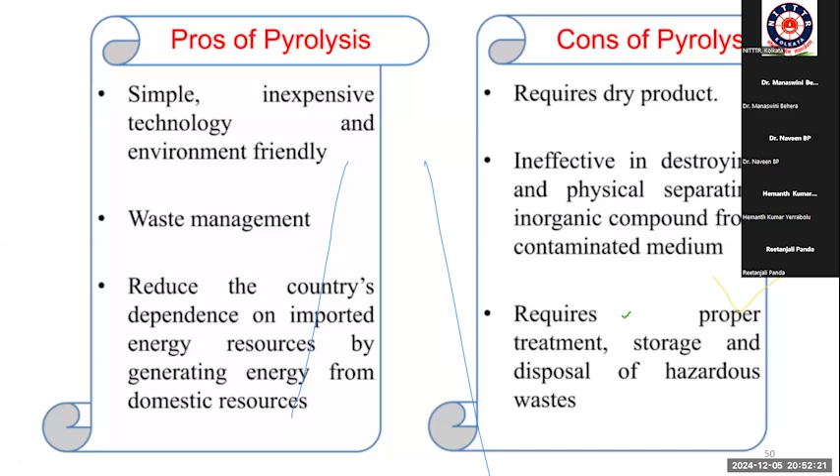Pyrolysis is ineffective in destroying and physically separating inorganic compounds from the contaminated material. So whatever biochar or bio oil is produced may contain undesired material, many toxic or inorganic compounds. So bio oil, without proper treatment or purification, cannot be used directly. It requires proper treatment, storage, and disposal of hazardous material.

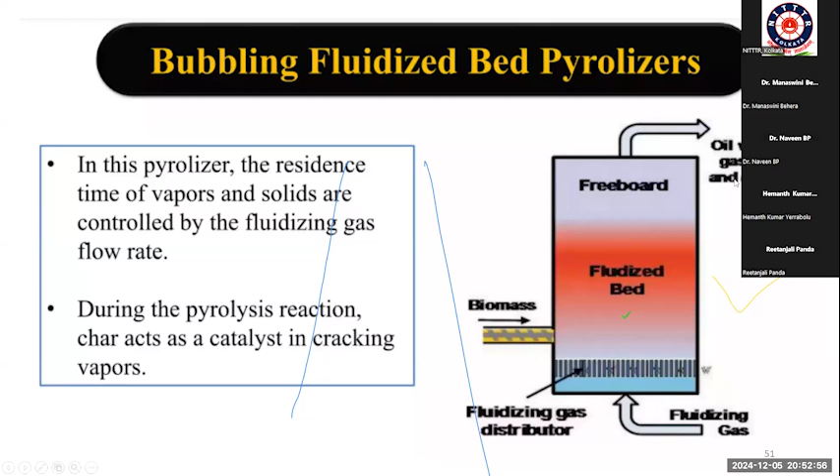Then types of pyrolyzer: one is bubbling fluidized bed. Like fluidized bed, I have already told you - some bed material is there, over that gas is injected and the solid waste is fluidized or kept in suspension. The residence time of the vapor and solid are controlled by the fluidizing gas flow rate. During the pyrolysis reaction, char acts as a catalyst in cracking vapor, and the end products are oil vapor, gas, char, and aerosol.

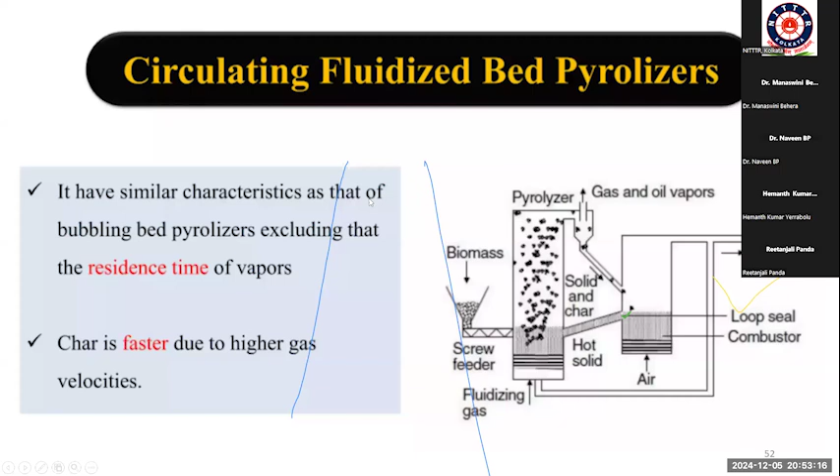There is also circulating fluidized bed pyrolyzer. It has similar characteristics to the bubbling bed pyrolyzer, excluding that the residence time of the vapor and char is faster due to higher gas velocity.

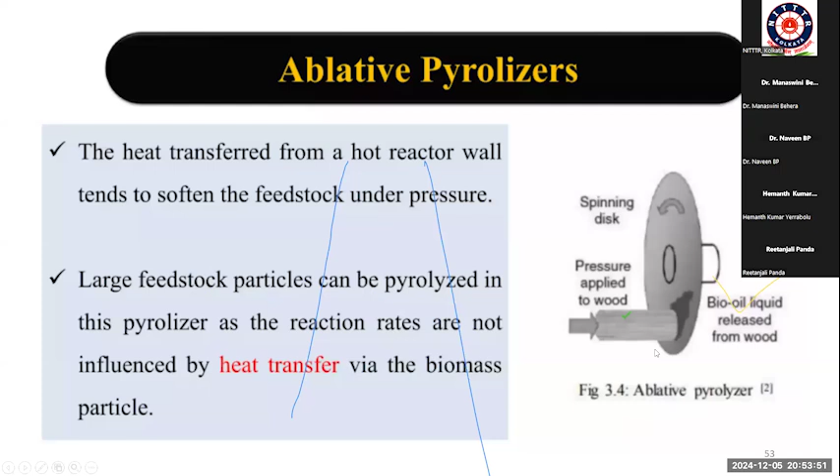The method of pyrolyzing biomass can be external heating or internal heating of the biomass. In internal heating, sufficient air is provided to maintain combustion, and above or below the biomass, air is introduced, and heat from the flame pyrolyzes neighboring biomass, liberating more gases to sustain the process. The flame around the charred biomass consumes the oxygen and protects the char from oxidation.

Generally pyrolysis occurs in the absence of oxygen, but if we are not providing inert gas, some oxygen may prevail in the fuel gas. In that case, there is a flame around the charred biomass which consumes oxygen, so that the biochar produced is not oxidized, and excess secondary air is introduced to fully and cleanly combust liberated gases above or separated from the biomass.

In case of external heating type of pyrolyzer, a separate source of heat is applied to the vessel containing the biomass from outside. There is no burning inside, and heat can be recycled to continue the process.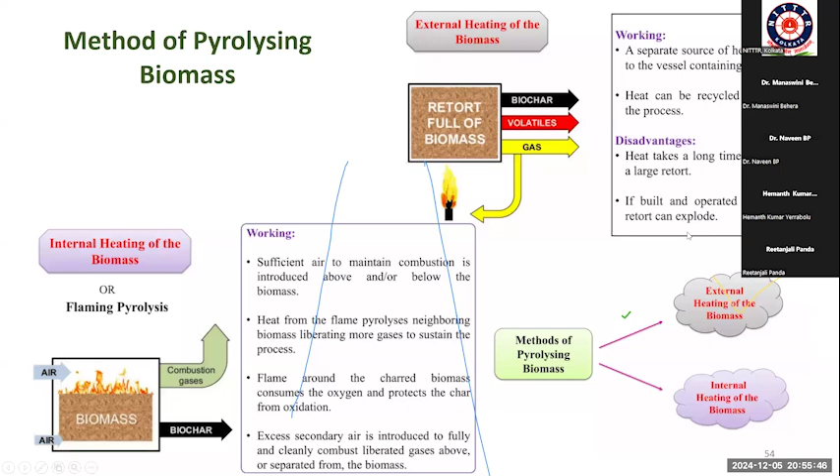The major disadvantage is that it takes a long time to penetrate a large quantity. If the size of the pyrolyzer is more and it is processing large quantity of solid waste, then it will take long time for the heat to penetrate to the MSW and reach all the solid waste particles. And if built and operated carelessly, it can explode also in case of this external heating of the biomass.

Some of the advantages are that pyrolysis is simple, low cost, and capable of processing a wide variety of feedstock, producing gases, bio oil, biochemicals, and charcoal. It reduces greenhouse gas emission and waste going to landfill, produces a marketable product like electricity, and has low risk of water pollution, low risk of odor, high recovery rate of resources, minimal risk of health consequence, and is commercially proven - because biochar produced, many researchers have shown, can replace commercially available fuel, and bio oil can replace crude oil.

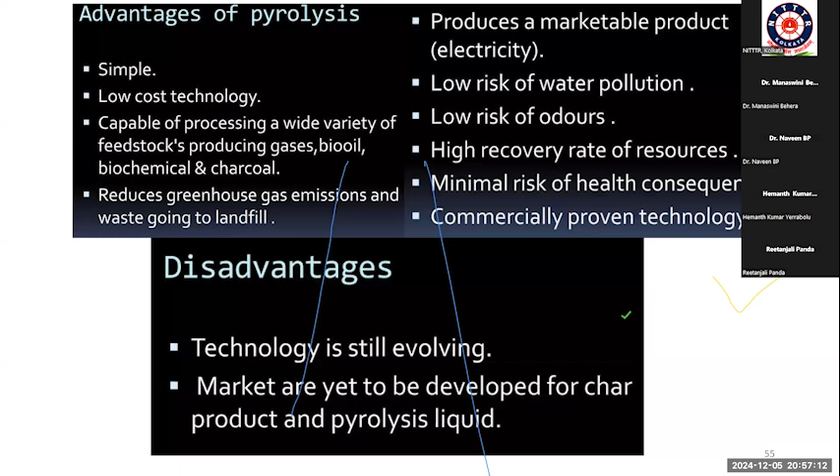But there is a disadvantage - it is still evolving. All these results and advantages shown are based on laboratory or at least pilot scale. Commercial scale, large scale implementation and success stories are very limited, and markets are yet to be developed for char product and pyrolysis, because of the post processing requirement of the biochar as well as the bio oil, since it cannot be directly used.

Then the next technology is gasification. Gasification is a process that converts organic or fossil-based carbonaceous material at high temperature, mostly above 700 degrees centigrade, without combustion.

With a controlled amount of oxygen or steam, biomass is converted into carbon monoxide, hydrogen, and carbon dioxide. Here you can see the flow chart for biomass displayed. Biomass like rice husk, sawdust, coconut shell, or segregated part of the MSW. Then in the gasification reactor, the air is introduced.

At higher temperature, the solid waste is converted to synthetic gas like carbon monoxide, H2, N2, tars, and dust. In the next phase, synthetic gas cleaning occurs, and carbon monoxide reacts with water to form carbon dioxide and more hydrogen via the water gas shift reaction. Absorbers or special membranes can separate the hydrogen from this gas stream.

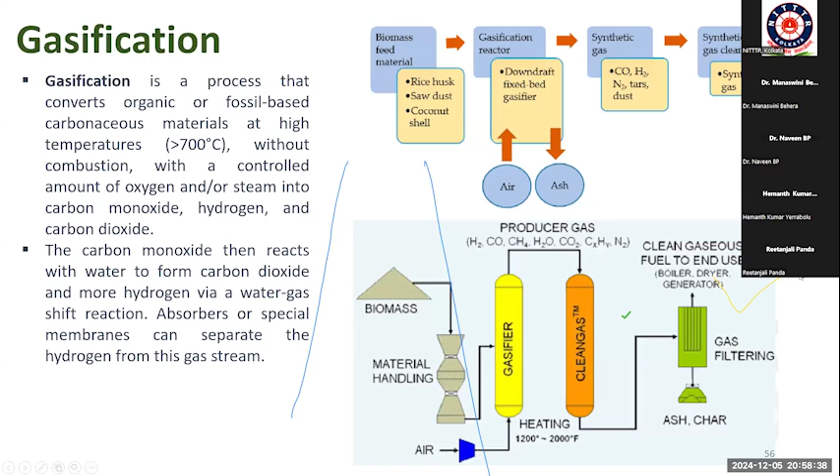So in gasification, mostly solid waste is converted to producer and syngas, then cleaned into gaseous fuel for end use. In biomass gasification, at low temperature gasification, producer gas is generated, which is mostly CO, H2, and methane. Then at high temperature or catalytic gasification, syngas, mostly CO and H2, is produced.

Gasification is a thermochemical process. It converts any carbon containing material into a combustible gas by supplying a restricted amount of oxygen. In case of biomass feedstock, this gas is known as wood gas, producer gas, or syngas, composed primarily of carbon monoxide and hydrogen as fuel, together with a small amount of methane. It will also contain other compounds such as sulfur and nitrogen oxide depending on the chemical composition of the solid waste. Under typical gasification conditions, oxygen levels are restricted to less than 30% of that required for complete combustion.

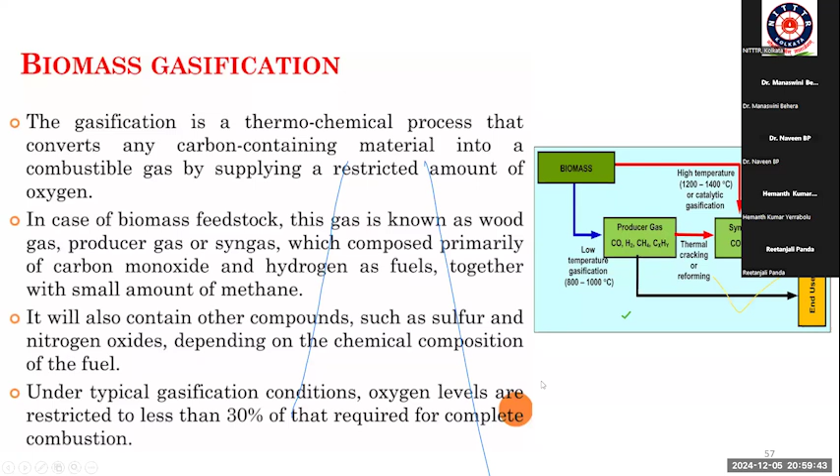Producer gas as well as syngas require gasification agents. The oxidant for the gasification process can be either atmospheric air or pure oxygen. Air gasification of biomass produces a low calorific value or low megajoule gas, which contains about 50% nitrogen and can fuel engines and furnaces. Gasification of biomass with pure oxygen results in a medium calorific value or medium megajoule gas free of nitrogen. This system also offers faster reaction rate than air gasification, but has the disadvantage of additional capital cost associated with pure oxygen.

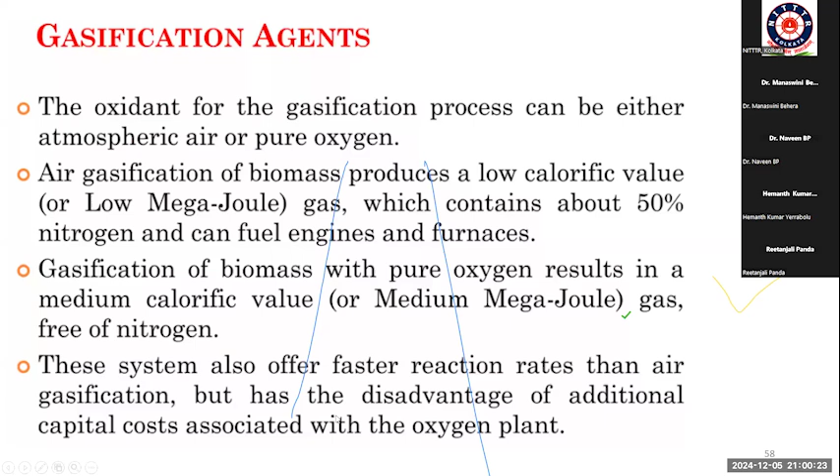What are the gasification end uses? Syngas or producer gas can be burned to create heat or electricity. It can be converted to methane and fed into the natural gas distribution system. Syngas can also be converted to methanol, ethanol, or other chemicals or liquid fuels. Methanol produced through gasification can be further refined into biodiesel with the addition of vegetable oils or animal fat.

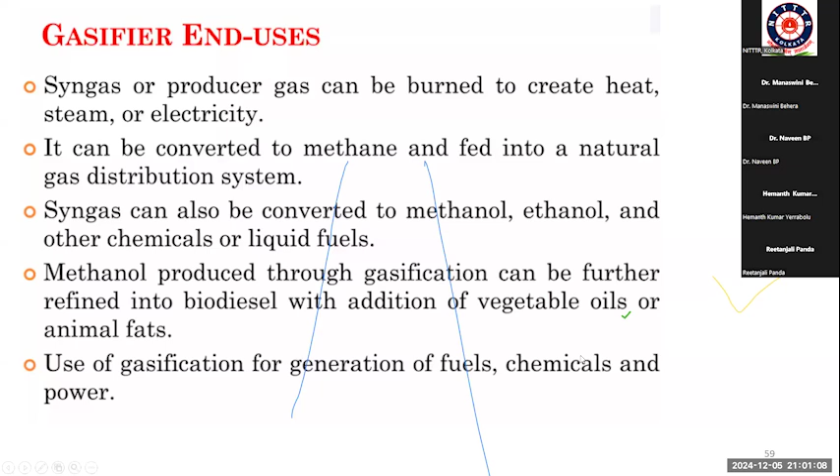This shows the use of gasification for generation of fuel, chemicals, and power. What are the advantages of biomass gasification? It produces a more convenient, easily controllable form of cleaner fuel for both thermal energy and electricity generation. Gasification gives biomass the flexibility to fuel a wide range of electricity generation systems, like gas turbines, fuel cells, or reciprocating engines. A wide variety of biomass material can be gasified, many of which would be difficult to burn otherwise. Gasification offers one means of processing waste fuel, many of which can be problematic.

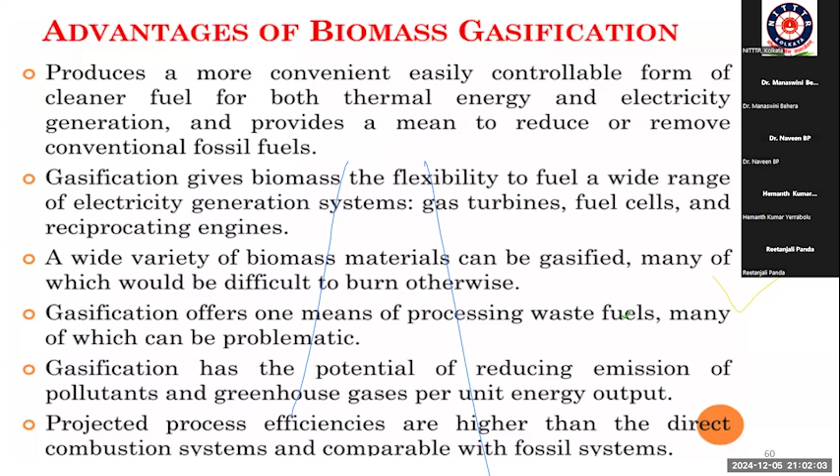Gasification has the potential of reducing emission of pollutants and greenhouse gases per unit energy output. Projected process efficiencies are higher than direct combustion systems and comparable to fossil systems.

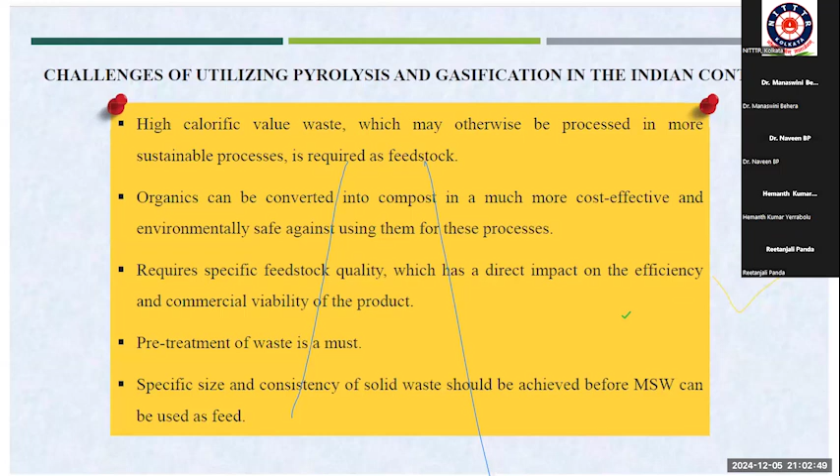Finally, what are the challenges of utilizing pyrolysis and gasification in the Indian context? We need high calorific value waste, which may otherwise be processed in more sustainable processes, is required as feedstock. Organics can be converted into compost in a much more cost effective and environmentally safe way against using them for these processes. It requires specific feedstock quality, which has a direct impact on the efficiency and commercial viability of the product. Pretreatment of the waste is a must, and a specific size and consistency of solid waste should be achieved before MSW can be used as feed.

Everything we see should include the financial thing in terms of money or economy. As an environmental engineer, we should also see the environmental cost of the system. Even though a technology sometimes takes less money for operation or capital cost, what is the environmental cost behind it?

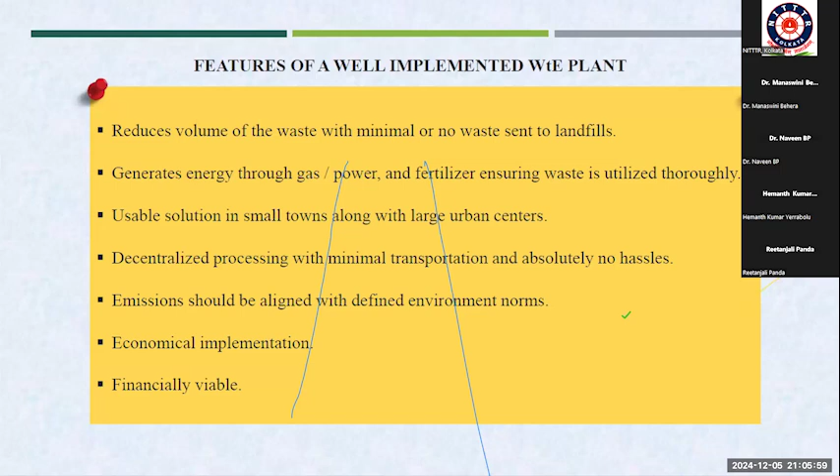With this, I end. My humble request to all the faculty members present here is that it is not just a lecture thing. All of you must be teaching the same thing in your classes, but how practically are we applying it in our own institution?

The first thing in the waste management hierarchy is refuse, then reduce. First, on our own, we should refuse to use some materials which are not required, then reduce our consumption so that waste generation is less. Then comes the management part.

First, educated people should educate others to maintain, manage, or reduce waste at the source itself, so that the waste going to the management facility is less and the burden on the environment is reduced. I will conclude. Thank you.